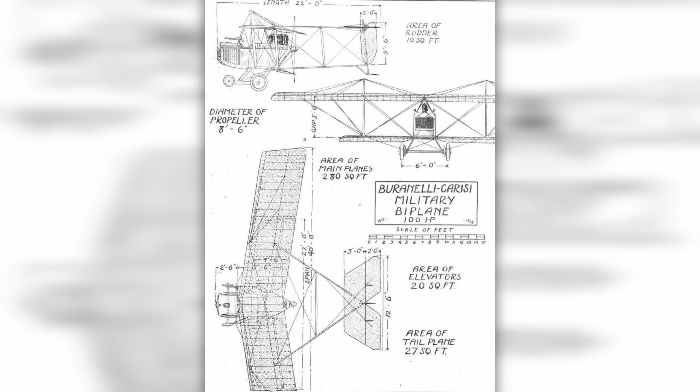We're looking at a lovely, bizarre plane designed by a lovely, bizarre man, and that is the Burnelli CBY-3 Loadmaster. Vincent Justice Burnelli was born on the 22nd of November 1895. He would have a passion for aviation from an early age, building his very first aircraft, the Burnelli Carisi Pusher, in 1915 at the age of just 20.

Following the end of the First World War, he continued his work, developing numerous aircraft concepts. He would eventually find employment in 1919 as the chief engineer of the Lawson Airplane Company. There, he helped to develop the Lawson L-2, a biplane airliner of which only one was built, and also the Lawson L-4, a more ambitious design which never actually made a successful flight.

Burnelli wasn't the sole designer of these machines, and indeed that was probably the problem. He disagreed with the design philosophies being imposed by the company's founder, and because of this he would quickly move on. In 1920, he entered into business to form the Remington Burnelli Company, hoping to pursue the development of commercial aircraft on his own terms.

In particular, Burnelli was somewhat obsessed with the concept of the lifting body, or lifting fuselage, style of aircraft. In traditional designs, the fuselage has a mostly symmetric, near-circular cross-section, allowing low drag for a large internal volume. Burnelli argued that this was a waste. Instead, if the fuselage had an airfoil section, like a wing, instead of being dead weight, it would contribute greatly towards the overall lift of the aircraft.

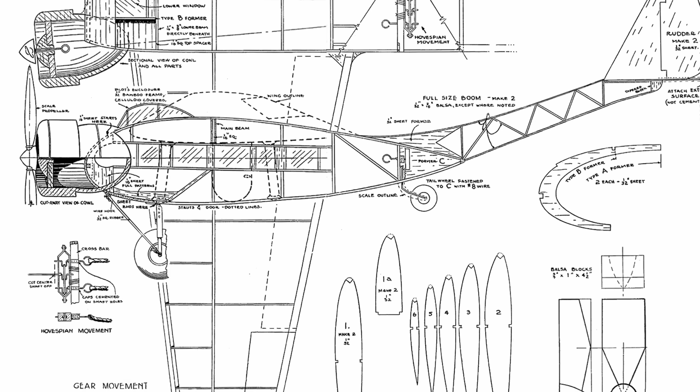Burnelli would spend pretty much his whole life trying to prove this concept, but unfortunately for him, it was a lifetime of frustration. Developing something new is often frustrating, because an aircraft like this is never just the result of one new invention or idea. It requires the successful development and combination of numerous concepts, systems, and materials. This includes aerofoils, engines, gearboxes, fuel systems, hydraulic systems, air screws, advanced alloys, and insulation materials.

It then gets even more complicated when it comes to the more modern aircraft powered by gas turbine engines. Now, most of these things aren't especially challenging to develop by themselves, but remove any one of them and the aircraft stops being practical very quickly.

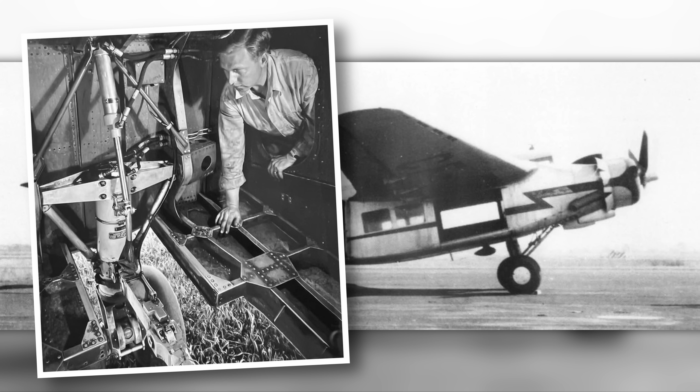The airframe was built from stressed skin metal with fabric-covered control surfaces, supported by a traditional metal framework. Power was to be provided by a pair of Pratt & Whitney R1830 radial engines, each delivering approximately 1200 horsepower. The fuselage was notably wide at 20 feet, and of course built of an airfoil section, with a length of 26 feet. The undercarriage was mounted to the fuselage and would retract upwards into it. This was handy as it would enable in-flight assessment and possible repairs to the gears, as well as allowing for manual extension in the event of an emergency.

At its highest point, the fuselage was approximately 7 feet tall, which meant that the average person could stand quite comfortably at the thickest sections. Passengers were arranged in 4 rows with 2 aisles, giving either a capacity of 22 or 24 passengers. Sources do differ, and unfortunately there is a serious scarcity of technical drawings for this thing.

Now, even with up to 24 passengers, this still allowed about 700 cubic feet to be dedicated to freight and cargo. This could be loaded through two large cargo doors on either side of the fuselage, allowing individual cargo items up to 20 feet long to be carried inside. Now, if more space was required, the passenger compartment section could easily be converted for storage as well, and this would give a total cargo capacity of just under 2,100 cubic feet.

In terms of control, the tail surfaces were mounted on the end of a pair of deep twin booms. Now, even with the lifting fuselage, wings themselves were of course still needed. The 3-spar wings had a total span of 71 feet, with a total lifting area, including the fuselage, being 1,291 square feet.

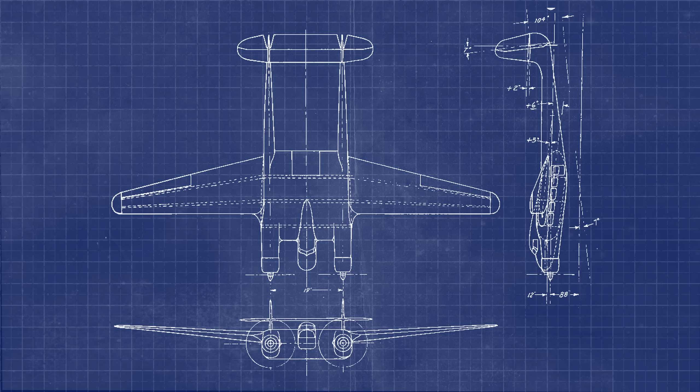For comparison, the lifting area of the Douglas DC-3 was around 987 or 988 square feet. Records show that multiple iterations of the design were drafted up by Burnelli in the initial design phase, and it seems that one of the biggest challenges was the location of the cockpit.

Naturally, it sat in the center, but because the engines protruded from the wings, it meant that sideways visibility was severely impeded. This was somewhat addressed by raising the cabin slightly upwards, but you could only do this by so much before you start severely impacting the aerodynamics. In the end, the design was finalized with the cockpit protruding as part of a sort of vaguely streamlined hump.

Construction would start in December of 1943 at Montreal, but given the slight issue of this thing known as the Second World War still being in full swing, production was understandably slow. Experimental transport planes for export were always going to play second fiddle to warplanes. But with Burnelli excitedly looking forward to his first design set to enter service in 2-digit numbers, and with the war beginning to turn against the Axis, things were looking up.

But, of course, Burnelli would be frustrated yet again. TACA would cancel their order for 20 planes before the first prototype was even completed. The exact reason for this change in heart is not entirely certain, but it is highly likely that it was linked to the fact that TACA acquired the single example of the UB-14 prototype for their operations and quickly found a whole slew of difficulties in operating it.

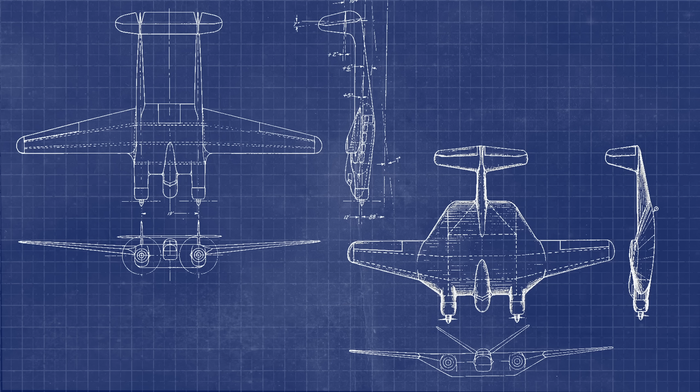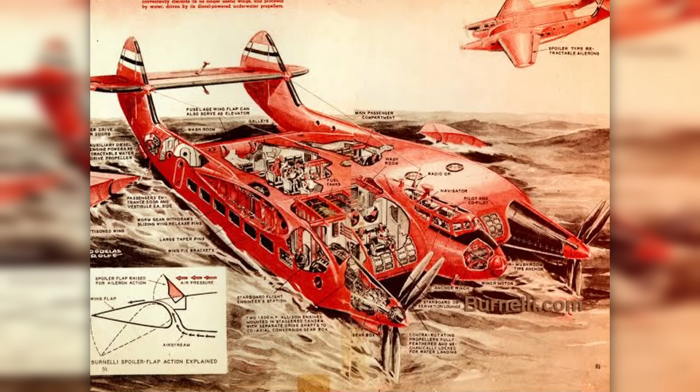The proposed Loadmaster 4 was a variation on this theme, and was essentially an upgraded and enlarged version, with a reported estimated loaded weight of 30,000 pounds and featuring a tricycle landing gear. Apparently, there were also discussions about producing it as a seaplane or as an amphibian, but we couldn't verify this across multiple sources with certainty.

There was a patent for a design similar to this from 1939, but we've been unable to find anything that links that to the designs that were being looked at by Cancargo. While all these designs were being mulled over, the other major focus for the company, of course, was finding somebody to actually buy the damn thing.

In March 1947, the Loadmaster began trials with Canadian Pacific Airlines as a freight transport. During these, it was operated from compacted snow runways around Quebec, delivering mining equipment between Mont-Joli, Seven Islands, and Knob Lake,

which, along with such other places as the island of Dildo, puts Canada in strong competition with Australia, featuring such places as Yorkeys Knob, Titwobble Lane, and Mount Buggery for salacious nomenclature.

However, crude giggling at location names aside, overall the trials were quite positive in their results, and the aircraft transported nearly 30 tons over a month, with the largest single payload being just under 7,000 pounds. But alas, this did not lead to any orders.

Now, at around the same time as this, the United States Air Force was also showing some interest, and they eventually evaluated the Loadmaster in the summer of 1948. It was noted that the lifting fuselage made the type less sensitive to the effects of unbalanced loads on the center of gravity, but once again the design was rejected, this time for having limited overall utility.

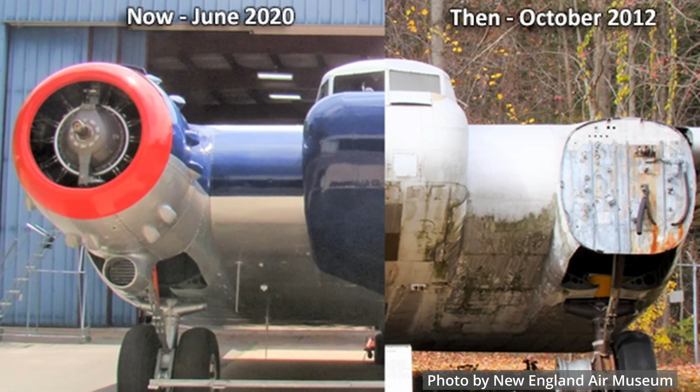But aircraft restorers are nothing if not amazing and persistent people, and although it took a while, decades in fact, the restoration work resumed and was eventually completed. To mark the high point of the aircraft's checkered career, it was restored to the same standard and paint scheme that it had had for the polar expedition. Today, looking just as it did during its prime, it is on display at the New England Air Museum, where hopefully it avoids any further tornadoes.

Burnelli was a man with a vision. A vision of an aircraft where the fuselage itself would provide lift to match with the wings. An efficient aircraft, capable of lifting great loads for its size and taking off in a remarkably short distance. The CBY-3 Loadmaster was, in many ways, this aircraft. It was his crowning achievement, but one that sadly the world did not want. Its oddities put off customers in a world of post-war civilian aviation that wanted proven concepts, not risks, and before long it was left well behind by the scores of aircraft now being powered by the gas turbine engine.

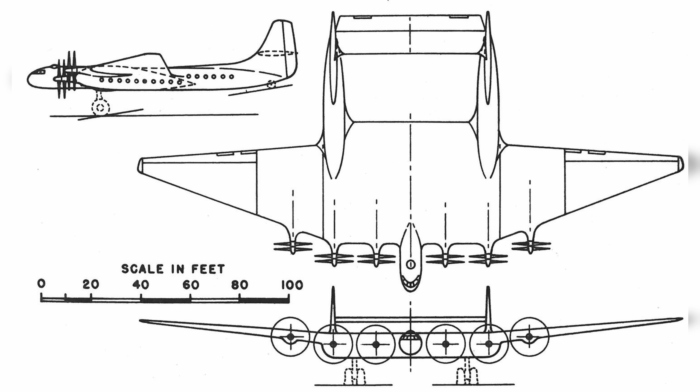However, his ideas are not without merit, and some of his other concepts were truly fascinating. So in the not-too-distant future, I'll be exploring Burnelli's other interesting designs, and the man himself in a bit more detail. But that, dear viewers, is a story for another day.